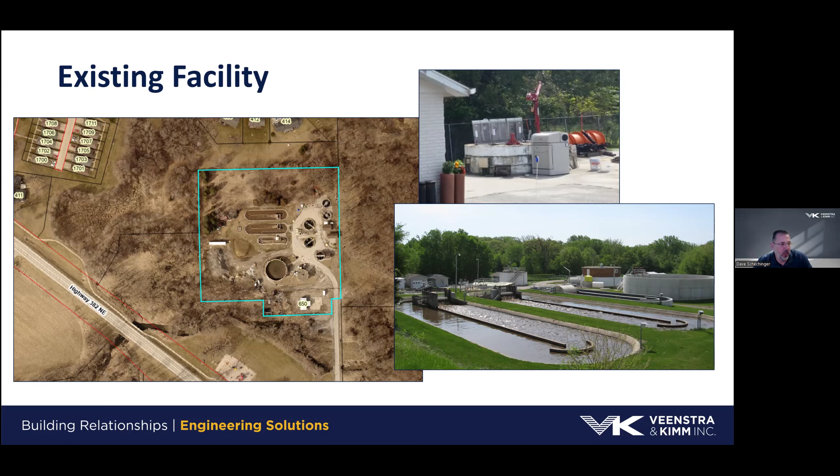Easterly, northerly, and to the west, we have limitations with setback where we're not allowed to exceed certain setback distances. That limits how far we can build new improvements. As you can see, the existing facility already has quite a bit built on it. To try to fit new improvements on that site would be very difficult, not only from a space constraint, but also due to the existing piping and the way we would have to construct the facility to keep the existing one running.

As well as a number of other challenges due to access and other issues. We have an existing facility made up of two oxidation ditches built in the 60s, and then a newer, smaller oxidation ditch built in the 2000 era. We also have, in the picture on the lower right, a tank in the back that is our sludge storage tank. Once we go through this treatment process and there are biosolids waiting to be land applied, we hold them in that tank. There's a small digester located in the far background, and the top picture shows the main lift station.

That lift station is limited in size, and we have pumps in there that are pretty much at capacity. To try to do additional pumping in that location would be very difficult. We would be looking at building a new facility in that area. That existing wet well does not have any screening, which creates a challenge for operations. The operators are required to use the red winch shown in the upper right picture to lift out a trash basket that catches large debris we want to keep from getting into the oxidation ditches. That's a very difficult and tedious manual process, and the new facility should have screening to avoid a lot of these issues.

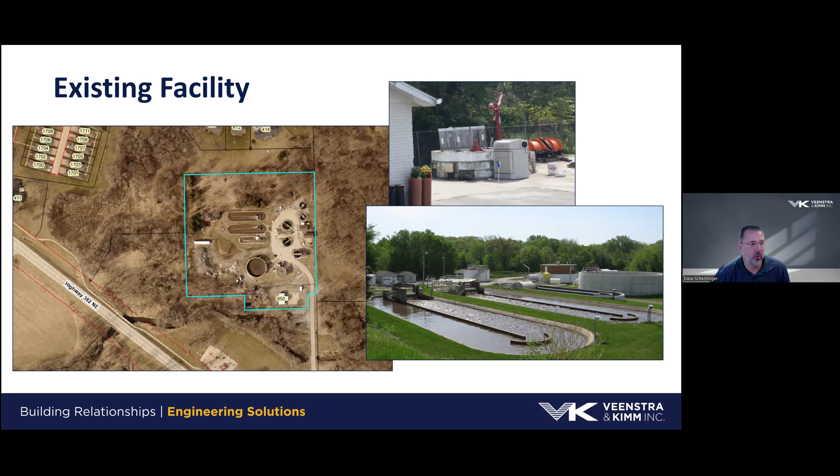Emily, if you could go to the next slide, please. Some of the things we take into consideration when planning wastewater treatment facility improvements are the growth areas.

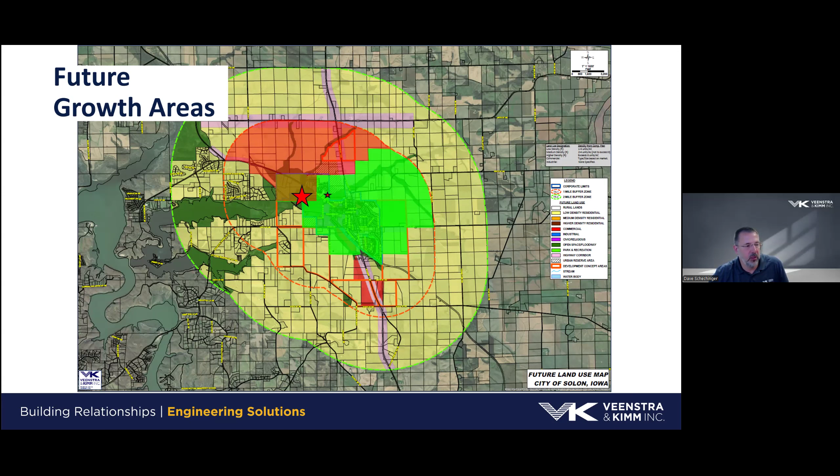The decision to go from the existing facility west to the new facility has to be made at some point because that existing facility would eventually fill up. Knowing there are significant challenges, not only with access but with the age of the facility, the city has looked closely at the two options and identified the new facility at the location of the large red star as the preferred alternative to take on the needed improvements now, rather than continuing to add to the existing facility, knowing that at some point it has to be abandoned and an entirely new facility built in the future.

So the red star location is where we would look to build the new facility. Emily will get into some of the specifics of what is required in the analysis and design of the new facility.

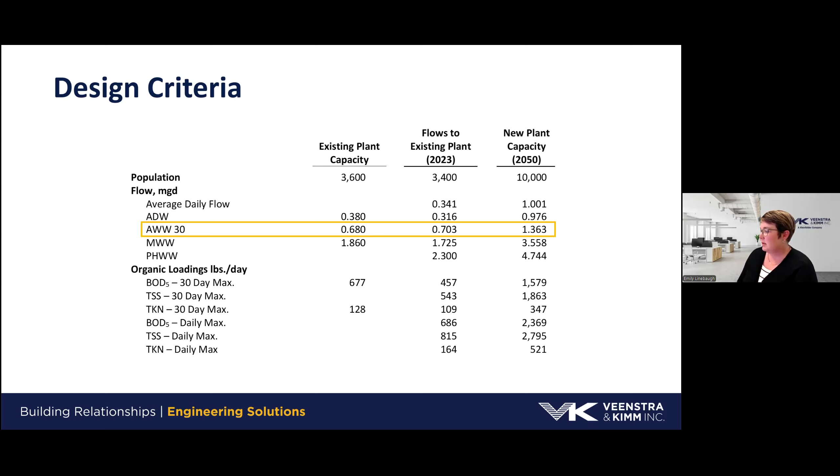The most important thing to recognize is that this plant will be over 1 million gallons per day, which will trigger it being considered a major facility for the state of Iowa. With that also comes the requirement to meet nutrient removal limits of nitrogen and phosphorus that the plant currently does not have to meet.

In order to meet the new limits as well as size for future growth, we're required to look at alternatives as part of EPA's requirements. These alternatives must justify the degradation that will occur by discharging additional pollutants to the stream, based on quantity and also the fact that we're relocating the discharge point with a future plant. As part of this required alternatives analysis, we have to look at non-degrading alternatives as well as a base pollution control alternative, and then less degrading alternatives.

The six alternatives considered for this facility include recycle/reuse, land application of the wastewater, regional treatment to another facility that potentially already has capacity, a new AeroMod treatment facility, a new Carrousel treatment facility, and a new Carrousel treatment facility with flow equalization.

The first three alternatives on this list are considered non-degrading, meaning they do not affect the creek that would potentially be a discharge point. Recycle/reuse, land application, and regional treatment were all considered not feasible for this location and were eliminated from consideration and further development.

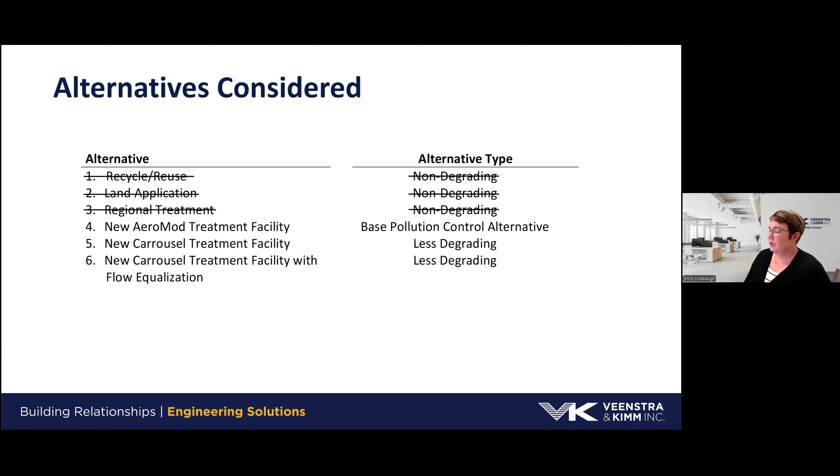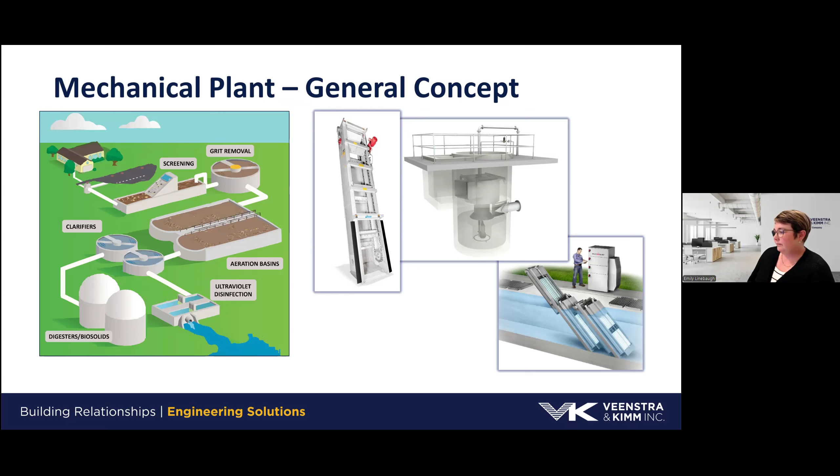Each of those alternatives we mentioned before utilizes that general mechanical plant concept, but does it in a different way. Alternative 4, the AeroMod treatment facility, is laid out on the new facility site that Dave discussed earlier. In this facility, we would flow from the new trunk sewer through pumps, screens, and grit removal, then over to an AeroMod tank, shown on the right, which illustrates that the aeration basins, clarifiers, and digestion for sludge treatment all share common wall construction.

We would also have additional biosolids storage and a dewatering building ahead of that so we could handle the solids generated as part of removing pollutants. We also allow space on that site for future expansion, which is a key component of moving to the new site, giving ourselves room to expand.

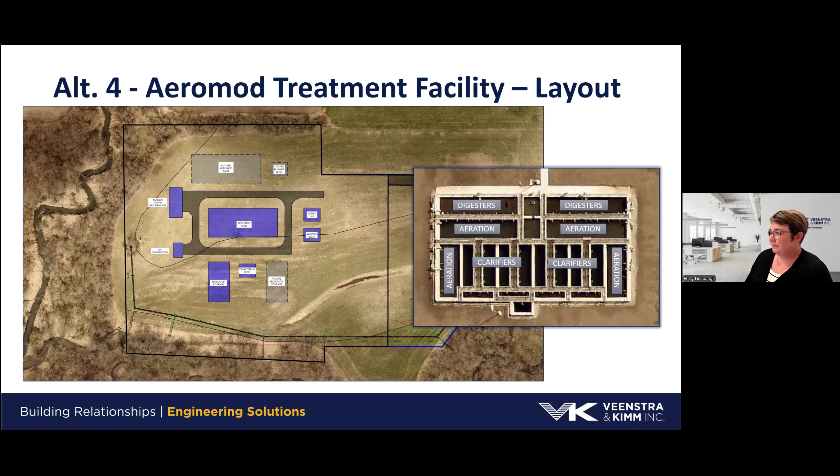The cost of the Aeromod treatment facility alternative, when all added together, has an estimated construction cost of roughly $29.3 million, with a total project cost of roughly $36 million.

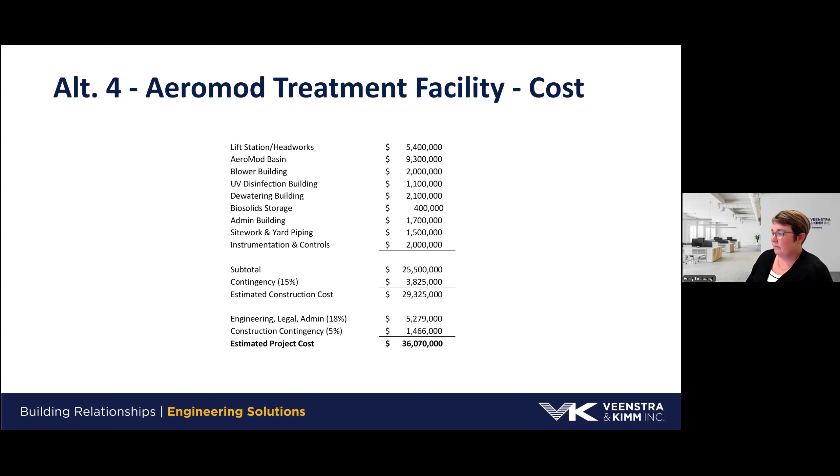Alternative 5, the Carrousel treatment facility, is also a mechanical plant and follows the same general process. However, it approaches it slightly differently in that the aeration basins are separate from the clarifiers and utilize a proprietary process for nutrient removal, handling aeration with propellers as opposed to a diffused aeration system.

The same advantages on this plant are shown on the facility layout. The plant additionally provides some benefit in that it is similar in operation to the oxidation ditch and clarifier layout at the existing facility, so staff would be more familiar with the process.

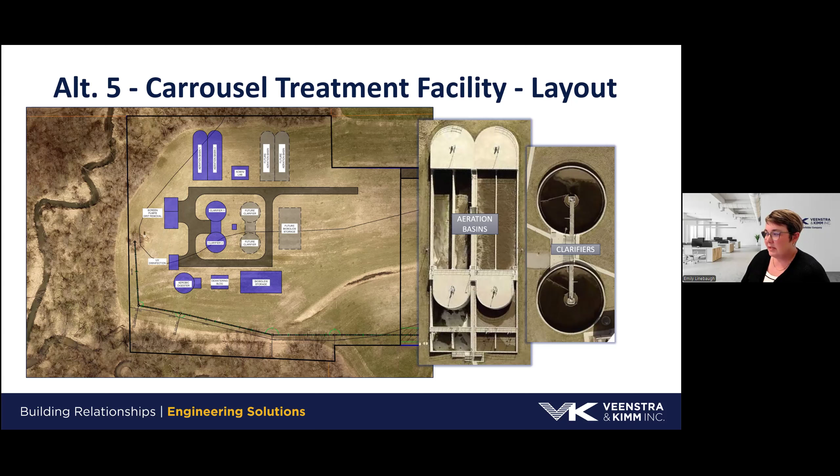The cost of this facility, when added up with each individual component, ends up being $29.7 million for estimated construction costs, with an estimated total project cost of roughly $36.5 million.

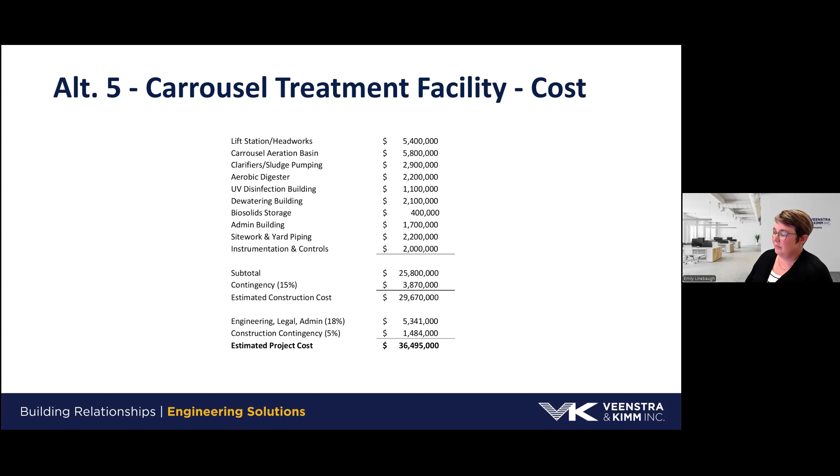The last alternative considered was a Carrousel treatment facility with flow equalization. This slide illustrates the additional utilization of the existing facility site to simply store any wastewater flows above the peak hour and above the plant capacity at the existing site, with minimal improvements necessary. Otherwise, it is the same facility shown in the earlier Alternative 5 layout at the new site.

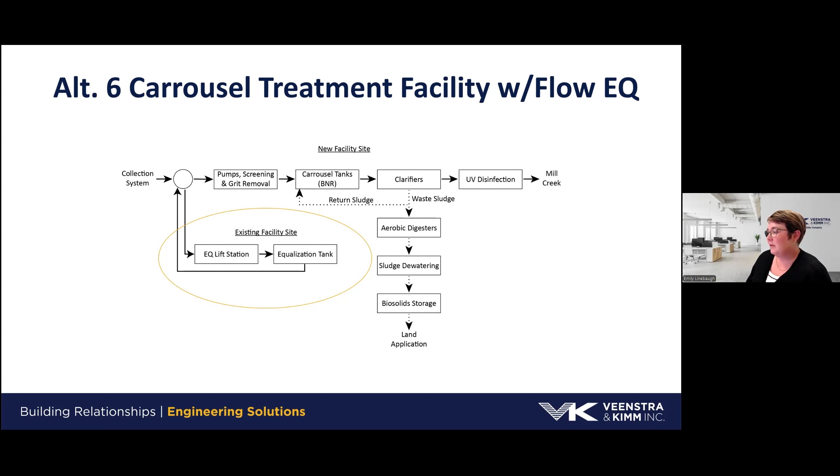But this would allow us to trim the flows back and maybe utilize some of the equipment at the new site, bringing it down in size just a slight bit. It also allows for a little more flexibility in operations, with a minimal increase in cost.

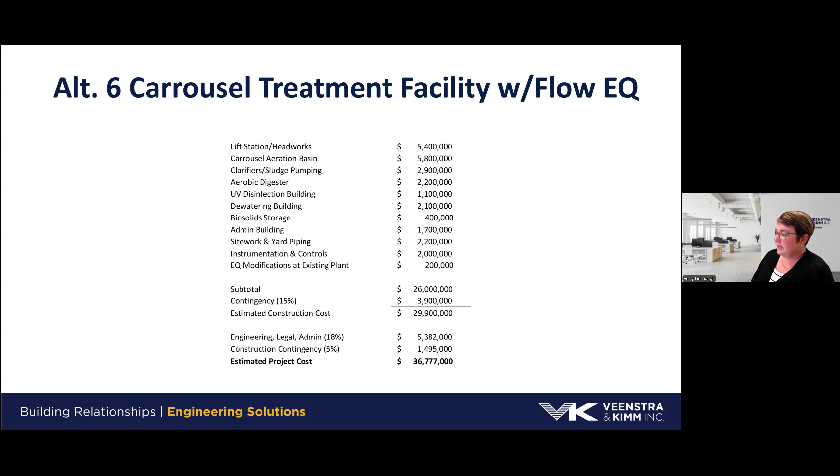As you can see here, the estimated construction cost is $29.9 million, with an estimated project cost of roughly $36.8 million.

Our recommendation after completing the analysis was Alternative 6, the Carrousel treatment facility with flow equalization. The main reasons we recommend this facility are that it meets the standards and provides nutrient removal, including nitrogen and phosphorus, which are new requirements for the city of Solon due to the size of the facility.

It also provides a process similar to what the current facility utilizes, but also improves the screenings and grit removal, is able to do nutrient removal, and provides solids handling improvements. The equalization component allows for peak flow reduction and accommodation of more flow range.

Due to the nature of the existing facility, it is difficult to accurately estimate a peak flow, so this will give us some buffer for any underestimation or potential future increases in I&I that tend to happen as systems age. This new facility also allows for expansion and some operational flexibility.

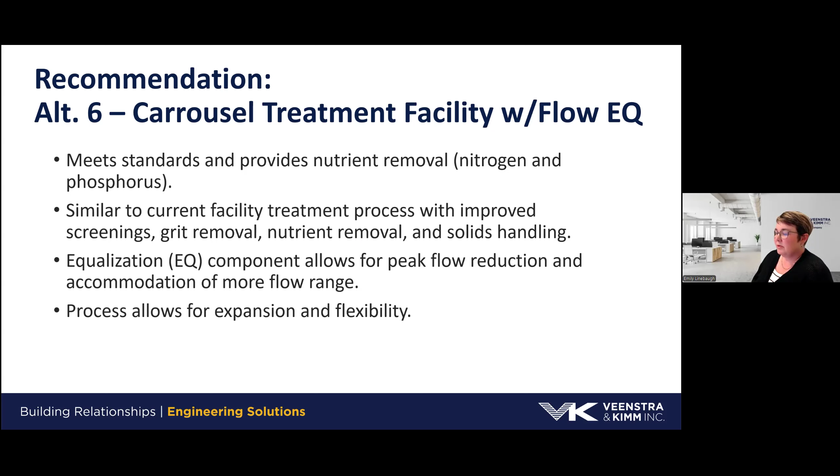Looking ahead at the project timeline, the anti-degradation analysis was approved as of June 2025. We will be submitting the facility plan to the Iowa DNR in the next month, and we will also be looking to fund these improvements with an application for the State Revolving Fund.

The design of the new wastewater facility improvements should occur from July 2025 through January 2027, with the project anticipated to be bid in February 2027. Construction of a facility of this size is anticipated to take approximately 2 years, with completion of the facility improvements and the facility online by June 2029.